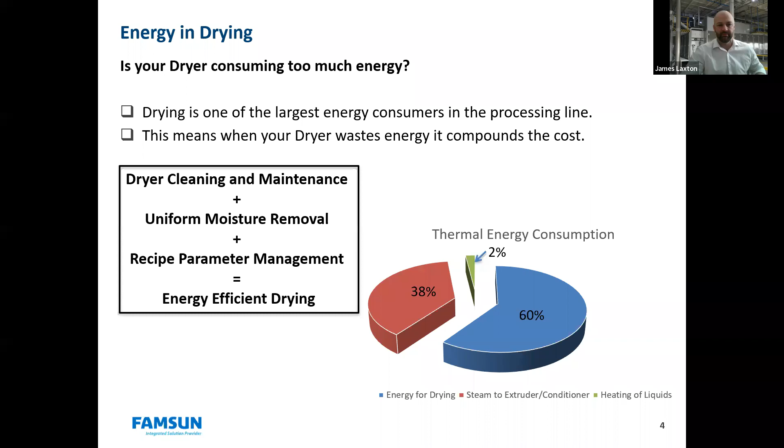So what is energy efficiency? So it's your target energy divided by your actual energy used. So it's the use of your energy to perform work and how well you're doing it. This should be one of the main goals for the operator of any production line. Of course, product output is probably number one, but maintaining an energy efficient production line is a close second.

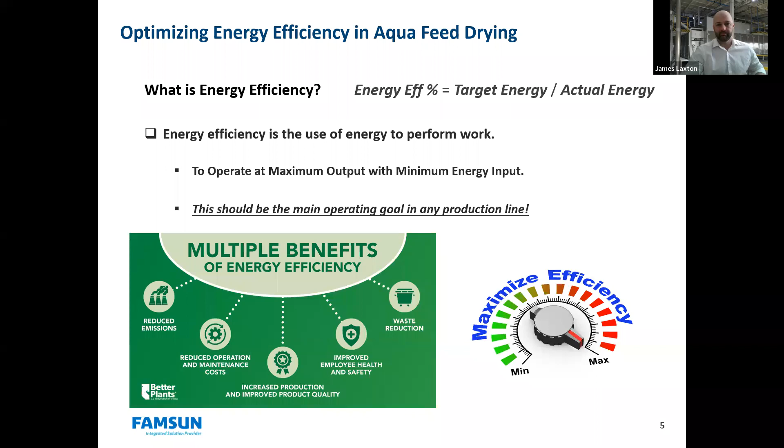So in order to calculate this energy efficiency between production runs, it's important to always use the same metric because you're not always using the same input parameters for each production rate. You could have different recipes, different rates, different machines, so it's a good metric to always have that energy efficiency as a percentage, just so it compares everything on the same plane.

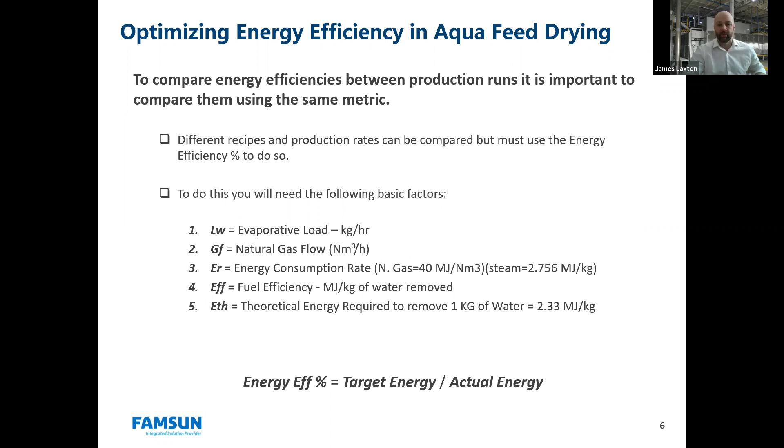So in order to do that, we're going to need some basic factors. You're going to need to know your evaporative load. You're going to need to know your natural gas flow, your energy consumption, your fuel efficiency, and the theoretical energy required to remove 1 kilogram of water. So let's go over some of this stuff and define it a little more.

Your evaporative load is the most critical factor because that's where you're actually doing the work. So you're removing that water, how much water you're removing. And all your other parameters should be set according to this, to the spec. And it's basically just found by taking your dryer output minus your extruder output, and that gives how much water you've removed.

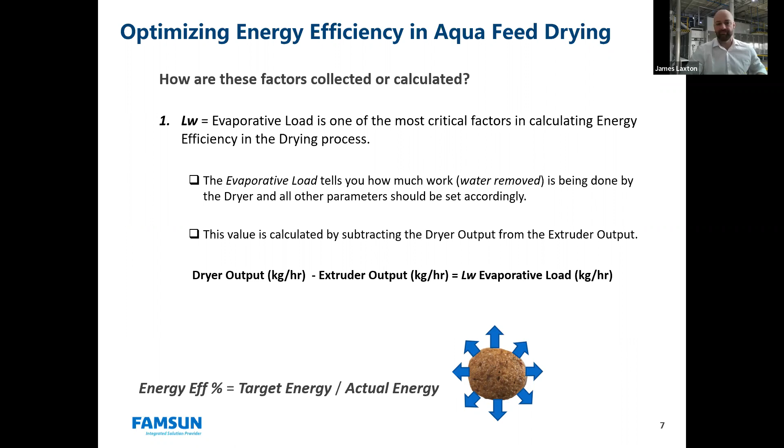So next we need to know your natural gas flow, or steam if you're using a steam dryer. This is taken directly from a flow meter in a gas or steam system. Your energy consumption rate is going to vary by region. It's a constant factor, but it's based on the type of fuel you're going to be using in that region, and they can vary slightly depending on where you're located. So the formula for that would be your energy consumption rate multiplied by your natural gas flow will give you your energy consumption rate.

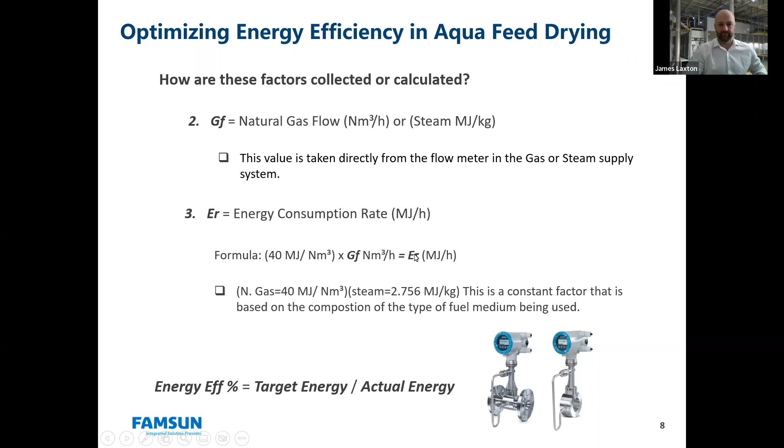So next you'll need your fuel efficiency of the water removed. It's calculated by the following formula: your ER, your energy consumption rate, divided by your evaporative load equals your fuel efficiency. That's pretty straightforward. Then the last number you're going to need is your theoretical energy to remove 1 kilogram of water. So this is a constant. This doesn't vary. This should always be what you're using as a constant. This is just what it is in physics to remove that much water.

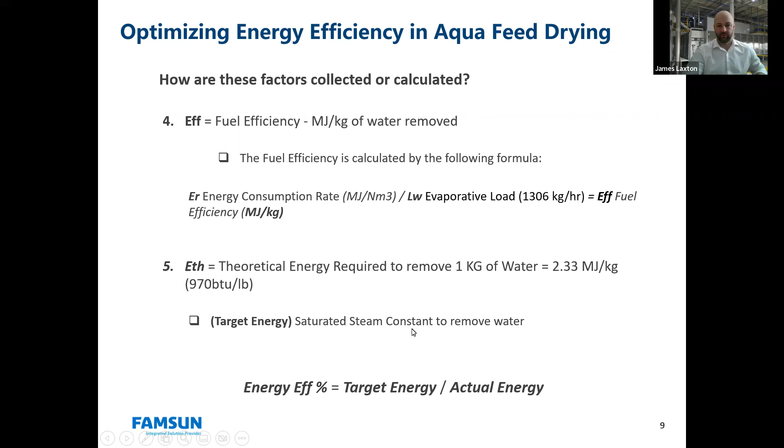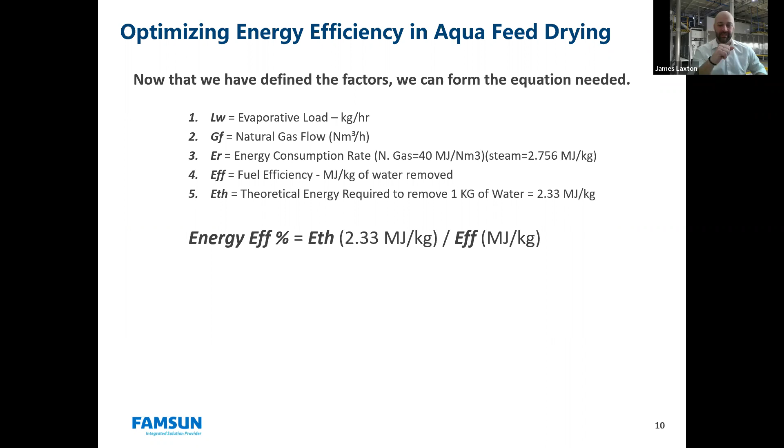So now that we have all those defined, we can put it into practice. We know the formula needed to do this. So what we're really trying to get at is your fuel efficiency, and your theoretical energy divided by your fuel efficiency is going to give you that energy efficiency percentage.

So that's the metric you want to use across the board for all different production rates, product types. That's going to give you the best baseline for comparing different dryers, different plants, different runs, all those things. So you can use that efficiency.

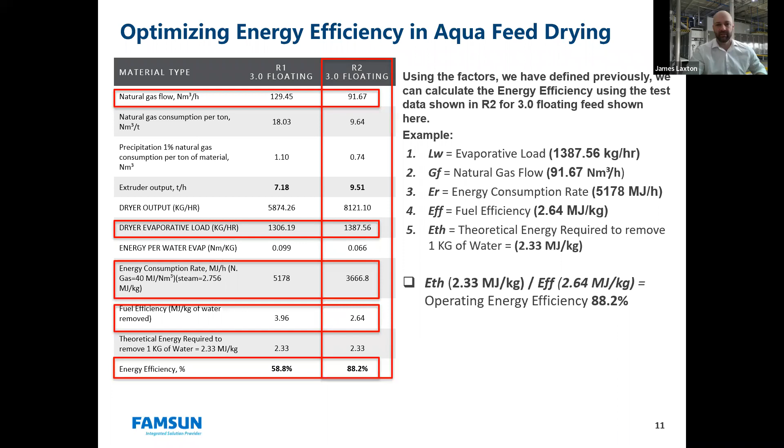So let's talk about what the operational factors that are going to impact your energy efficiency are. So there's two types of operating variables. One is your dependent variable, which the dryer in drying really has no control over. It just has to deal with them. And then you've got your independent variables, which are what you can control within the dryer. So all your parameter settings that you're going to have.

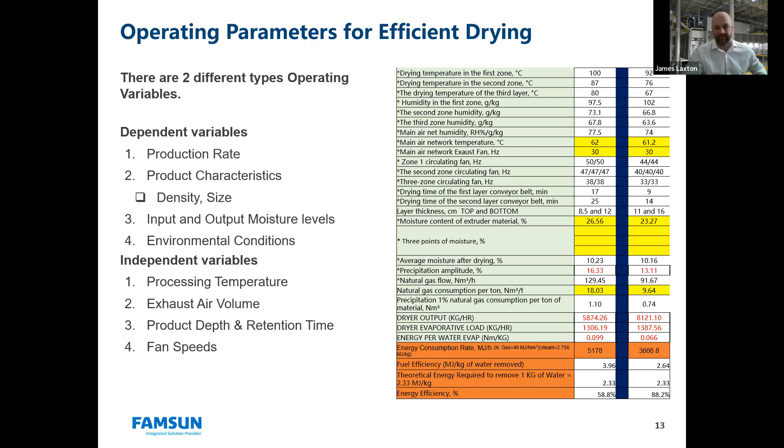So dependent variable, obviously you can't control that. So you got your production rate, incoming production rates, your product characteristics, density and size of the product, your incoming moisture, outgoing moisture. Those are the targets: you've got your extruder output target, and then you've got your dryer output target. So those are just your incoming and outgoing. Then your environment air conditions. This is just what you have to seasonally adjust to.

And that's really just, you can do energy audits on a dryer to somewhat control, kind of adapt to that environmental condition, but it's really just something you have to adapt to constantly because it can change the whole aspect of how you're drying.

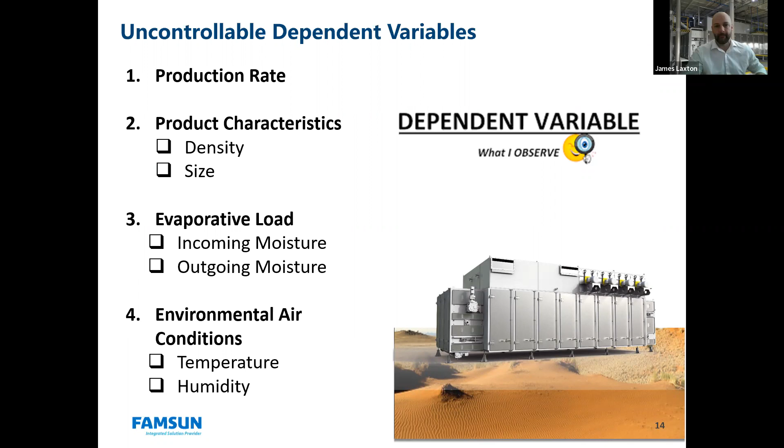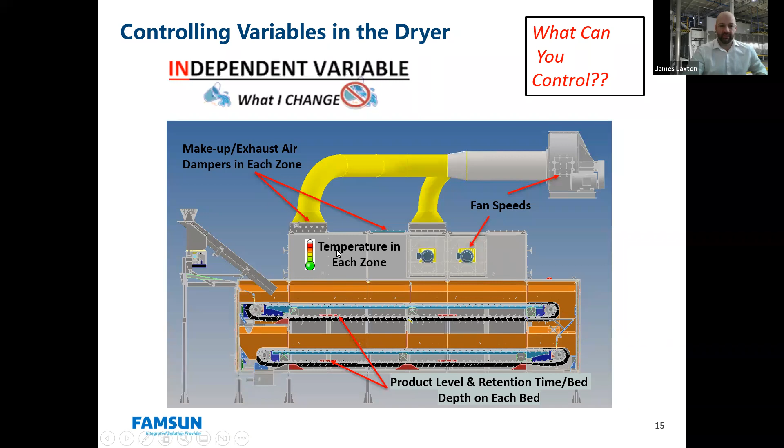So we'll look a little bit at the independent variables that you can change. So you can see you've got your exhaust air and the settings you can have with that. You've got fan speeds, and you've got your product level and retention time in your bed. And of course, the largest one would be temperatures, which is what actually is taking most of your energy up. So processing temperature, like I said, is going to be your largest consumer of that energy. Adjusting these temperatures can have a really large impact on your energy consumption overall.

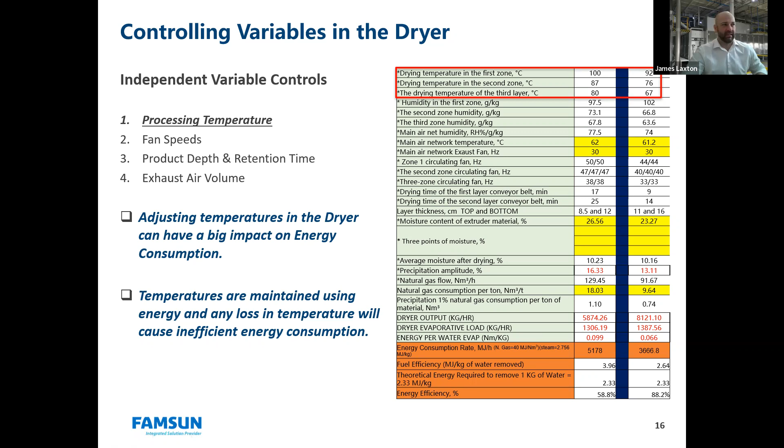And if you maintain these temperatures, you will have a nicely efficient dryer. But if you have any loss in these temperatures, you're going to really have an inefficiency. So next, you'll have fan speeds that you can control. You've got your recirculation fans, you've got your exhaust fans. These should always be set according to your testing or your product recipe that's in production at that point.

If you have a large difference in products, your 8 millimeter floating pellet versus a 1.2 millimeter sinking pellet, you're going to need a lot different fan speeds set for those two different types of products. So too much or too little can have extremely negative effects.

And that is also directly impacting what kind of product you're drying. So you need to be aware of that as well. So if the recipe settings are not followed correctly, you can get a lot of product build up all over the dryer, really.

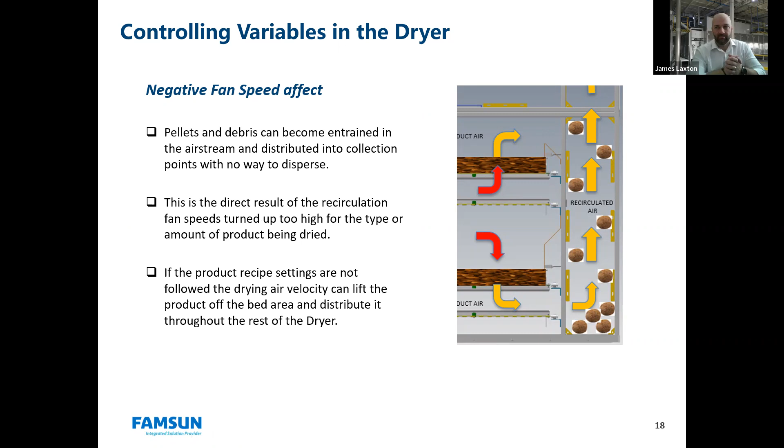So your product depth and retention time, you're going to adapt to the incoming production rate and production type, of course. The incoming production rate is going to determine the required retention time you're going to need. And that's going to determine your product depth. So time equals depth, really, based on what production rate you have constantly coming in.

So as we said previously, the fan speeds need to be set according to that. And this just kind of shows if you're using a small sinking pellet and you still have your fans turned up from a large floating pellet, you can get that lift off the bed.

And that's not good. That's when you're going to get your product distributed throughout the dryer. That's never a good thing, which can cause some energy inefficiencies and also shutdown for cleaning or maintenance.

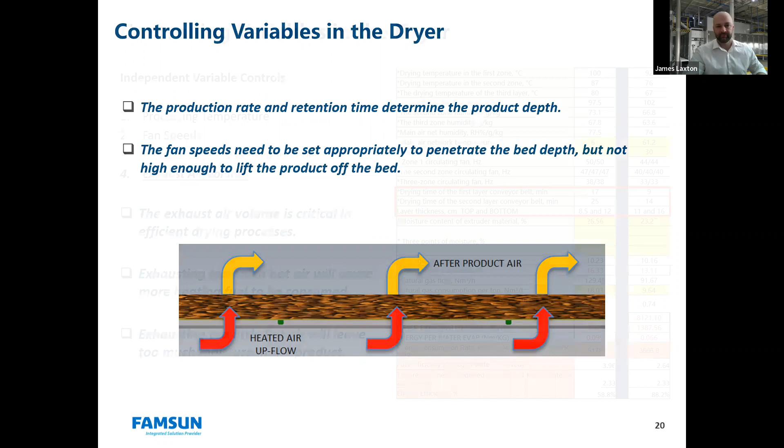So the last one here is exhaust air volume. And this is a very critical parameter setting for the efficiency in the drying process. Of course, if you exhaust too much hot air, you're going to have to reheat that cold air coming in at that same volume. So it can really increase the amount of energy you're using.

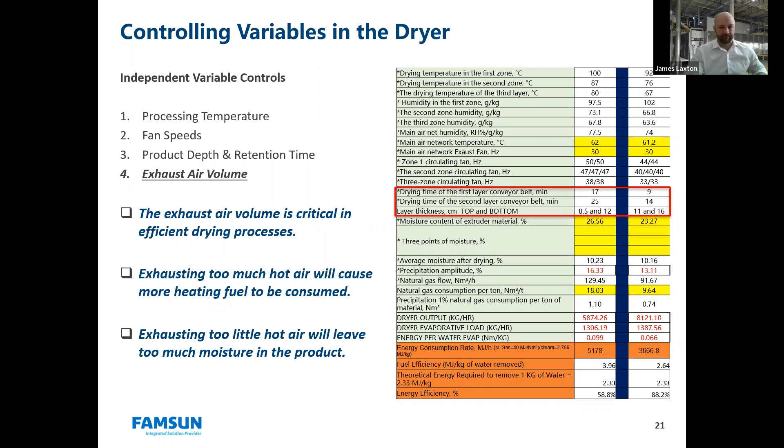On the flip side of that, if you're exhausting too little hot air, you'll leave too much moisture in the product, and you're not going to get a dry product. So you'll have to scrap that product or remill it. So the dampers also play a factor in how much air you're letting out or coming into the dryer, and can have some balancing issues. So very small adjustments in the dampers can have a large impact on your energy savings.

You always want to try and recycle the exact right amount of air. I know it's hard to do that, but really look at an optimal amount, take good measurements, do testing and have those presets already predetermined, so you know what's going to happen, and you're recycling the optimal amount of heat.

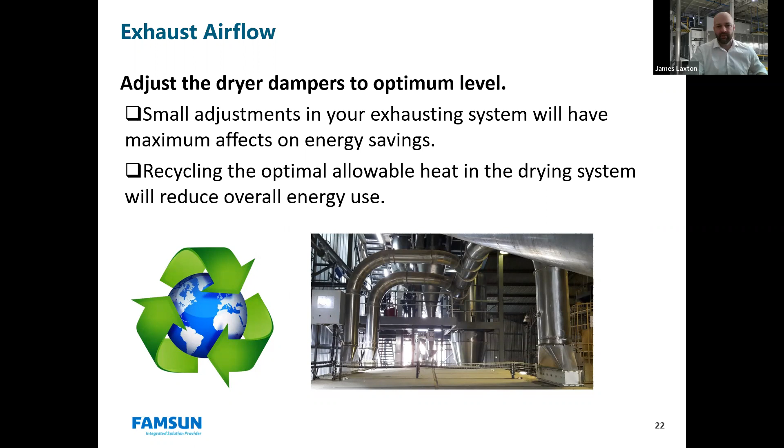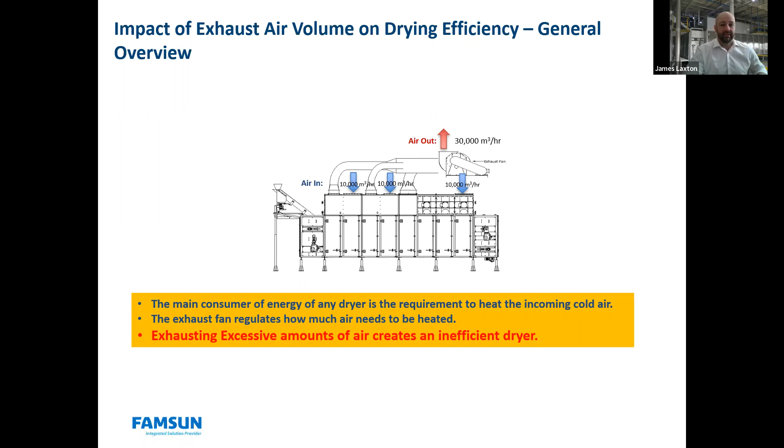So we know the main consumer of the energy is going to be just heating the air in general, but also in this case, reheating that air that's coming in. And that exhaust fan is going to regulate the volume of that air. And if you are exhausting excessive amounts, you're going to create a very inefficient dryer.

So in this case, we'll look at two different setups here, both doing the same evaporation rate. You can see dryer 1 and dryer 2. Dryer 1 is set at 100 degrees, dryer 2 at 120. And the exhaust rate is really what's changed here, along with the relative humidity. The exhaust rate of dryer 1 will be 15,000 cubic meters per hour. Dryer 2, 10,000 cubic meters per hour.

But you can see that because you're exhausting less, you can turn that heat up more and use a hotter environment to dry this process. And you actually end up using less, even though you're at a higher temperature, because you're exhausting less. So this will be the winner in this scenario.

And as I said, when you're exhausting less air volume, less cold air is going to be reheated, making the dryer more efficient. So when the exhaust air volume is reduced, recirculated air is more saturated and can cause uneven drying. So you need to compensate for this by heating the air up more, so that it can hold more water.

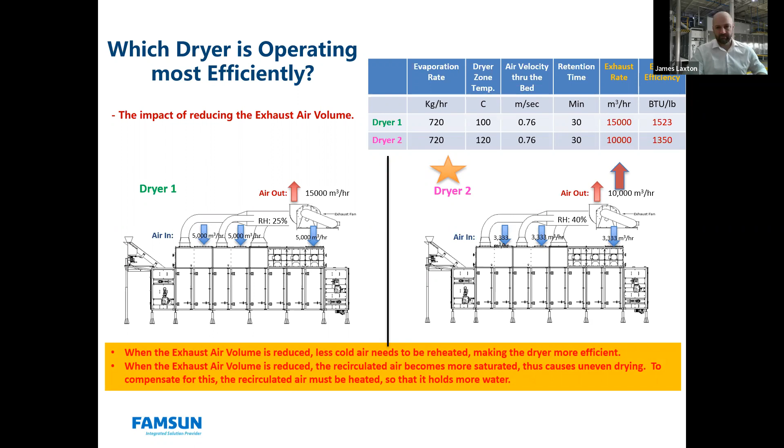So balancing the dryer is another very critical component. I mentioned it earlier, and just the environmental impacts yearly. In some regions, you have a wet and a dry season. You really need to balance your dryer to make sure you're optimizing the efficiency in doing that. So you can set your dampers accordingly. And you want it balanced so you're not over-pressurizing the dryer.

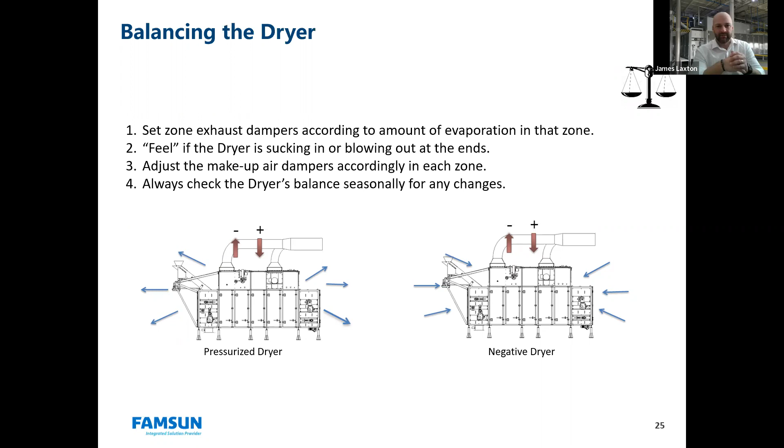If you open the door, you don't want the hot air just hitting you in the face and blasting out. You get dust and everything just coming right at you. You really want to have a small negative draw, but you don't want it to be so much of a negative that you can't even open the door. You don't want it to suction shut even if it's unlatched. You want to be able to access it and just have a slight draw where it's not pushing anything back out at you.

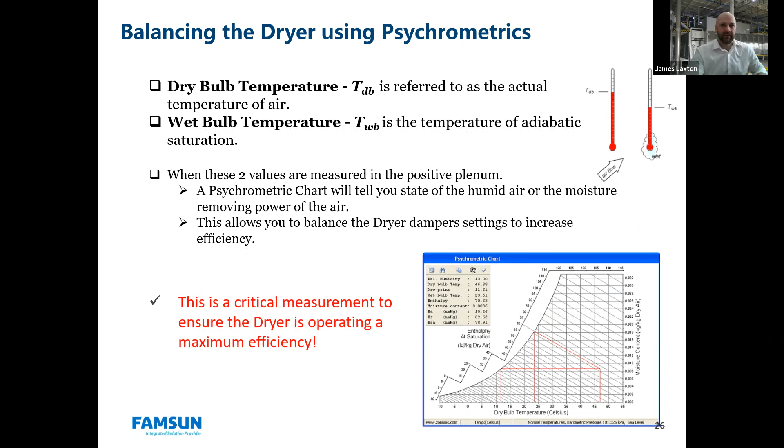So another way of balancing the dryer is by using the psychrometric tests: your dry bulb versus wet bulb, using your psychrometric chart. And this is a very good way to really fine tune the balance of your dryer, so you're operating at maximum efficiency. You've got everything set correctly, and you are exhausting exactly the right amount of air.

So another one is your product distribution. It's really critical to maintain an even distribution on that bed, because the way you put it down in the beginning is the way it's going to go through the dryer. And any deviation in that evenness or in that product spread level, air is going to find the path of least resistance. So it's going to exploit any drop or gap you may have in your feeding process. And as it goes through the dryer, each zone is going to exploit that more and more. And by the end, you're not going to have a very even dry product.

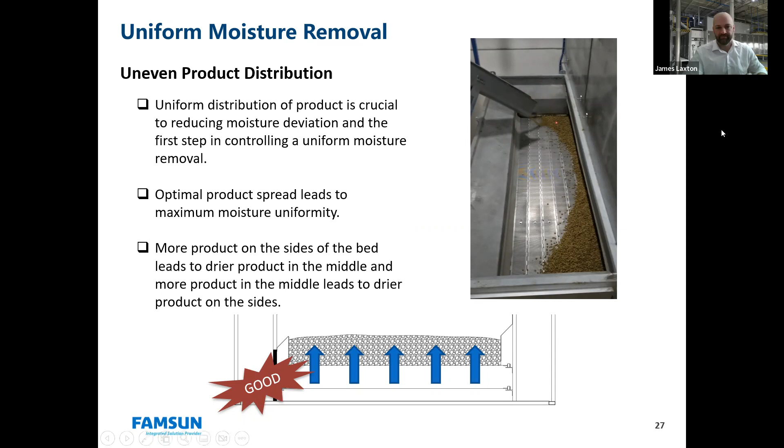So how can we improve energy efficiency? Well, the first thing you have to look at is losses. All dryers are going to have some losses, just based on the external air exposure to the machine itself, internal and external temperature variation, how well insulated the entire dryer is. And your typical loss is around 3% of the total heat in an Aquafeed dryer. The goal of any design of any dryer should be to really minimize those losses as much as possible.

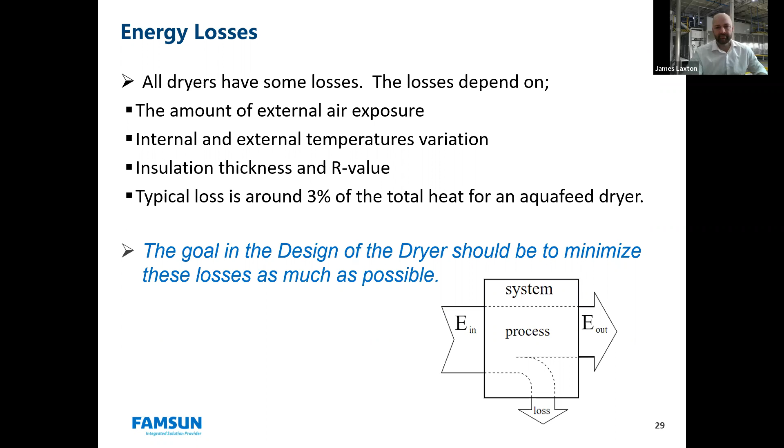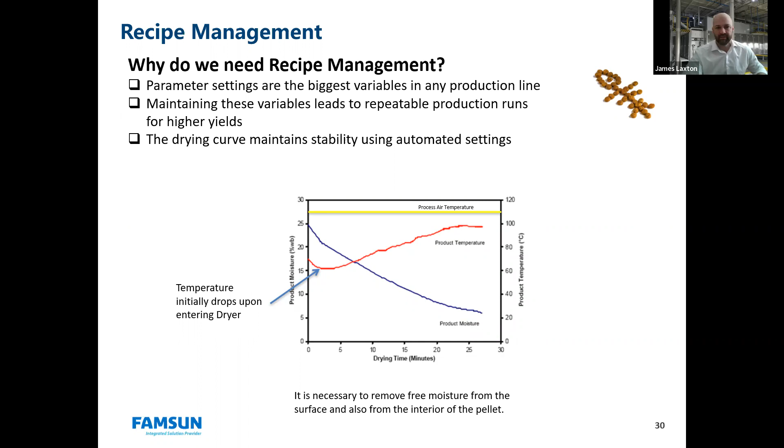Another way is using a recipe management system. And that really makes for a stable drying curve, where you can just click a button and it knows exactly what it needs to be doing for each preset recipe, and it just comes in and goes out, and you're up and running quickly, and you're producing at maximum energy efficiencies.

So as I said, having this preset recipe management system does a lot of great things for you. Minimizing waste is a huge one, but really staying consistent, not having huge deviations from operator to operator is a really key thing. And obviously rapid startup, you can change recipes, start it right up, click a button, and you're off. And just always knowing you're going to have that consistency, and knowing things shouldn't change from there.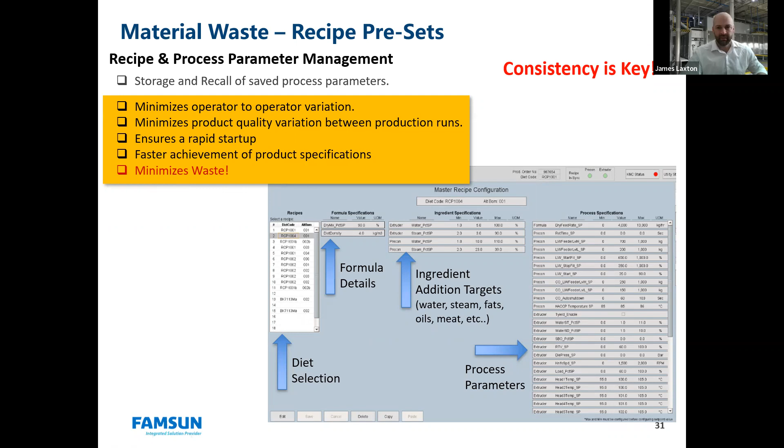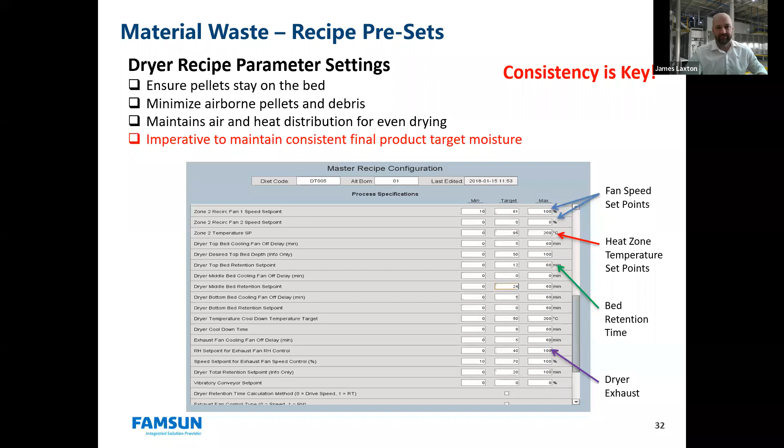So it'll also have some physical benefits, where you're not going to get your pellets in the airstream or distributed throughout the dryer. You're going to keep a fairly clean dryer inside as much as you can. You won't make any of those pellets or debris airborne. So knowing that in a lower bed depth, small pellet, the fans automatically change based on that recipe preset is really imperative to achieving your final moisture targets.

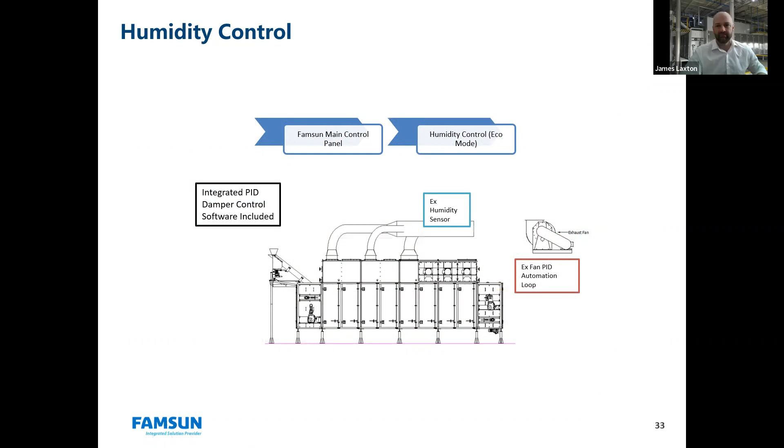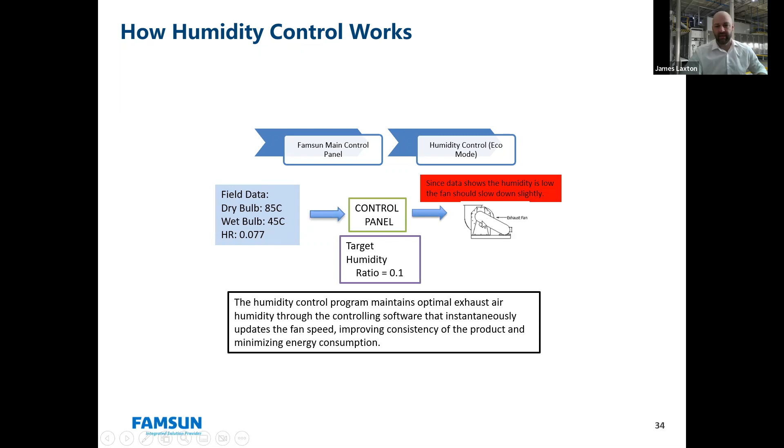So we can also use the humidity control system. This is a more advanced system where you're going to have software that modulates your exhaust fan and your dampers to really have an automated solution to exhausting exactly the right amount of air volume. So it'll use your dry bulb, wet bulb, HR in the control panel, and it'll speed up or slow down that exhaust fan and modulate the dampers as well.

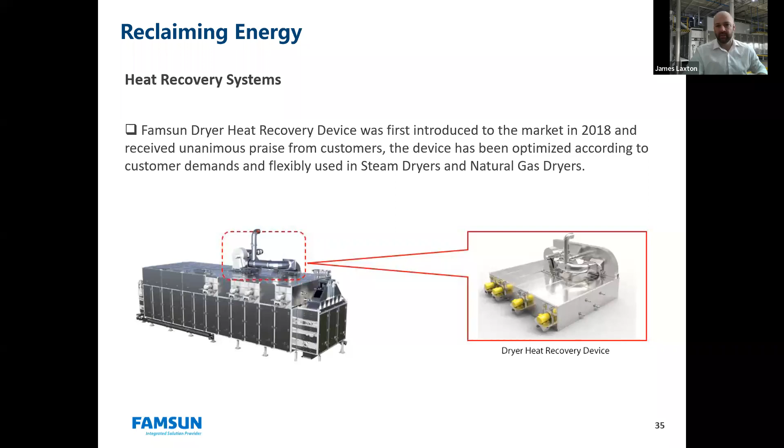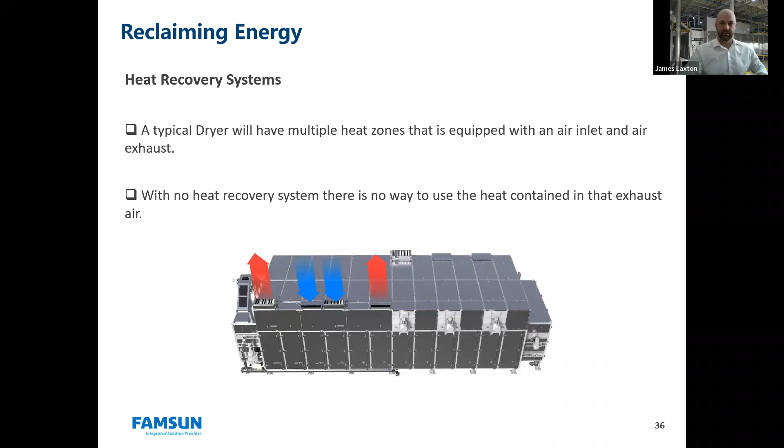Another way is using a heat recovery system. Famsun has developed a new dryer recovery device. It was first used in the market in 2018, and we've had great success with it with our customers. So, as we know, a typical dryer will have multiple heat zones, where you'll have more moisture removed in the first few zones than in the last few. In this case here, there's nothing to recapture that heat in the last zones to reuse it in any way.

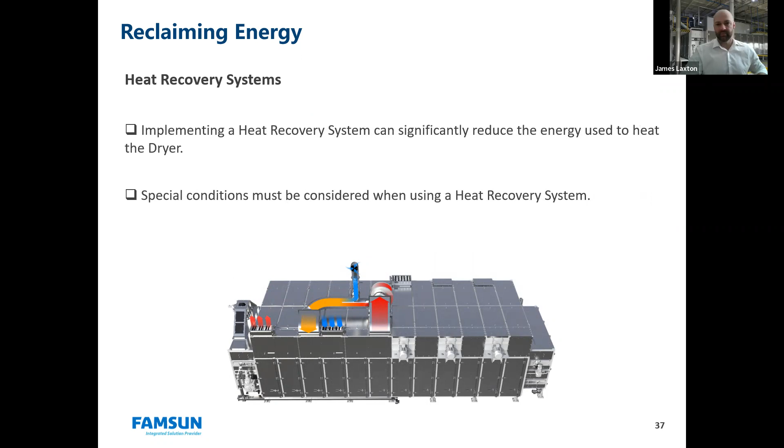So if we put the heat recovery system on, we can grab that heat that's otherwise being lost to the environment and reuse it in previous zones, which makes less work for the heating systems and results in a much more energy efficient system. So it can significantly reduce that energy and in turn save money.

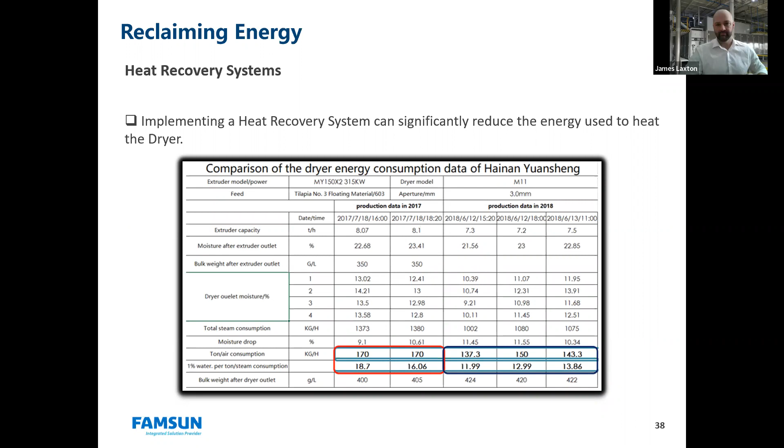And I always like to say, keep a clean dryer and have a cleaning schedule that you can maintain, I'd say once every 4 weeks at least. I like to see it every 2 weeks, but just keeping heat exchangers and filters as clean as possible really will go a long way in improving your lifelong energy efficiency. Not having that build up keeps cleaning cycles short and sweet, and you know what you're getting every time. So my recommendation is keep it clean, and you can create a great energy efficient dryer.